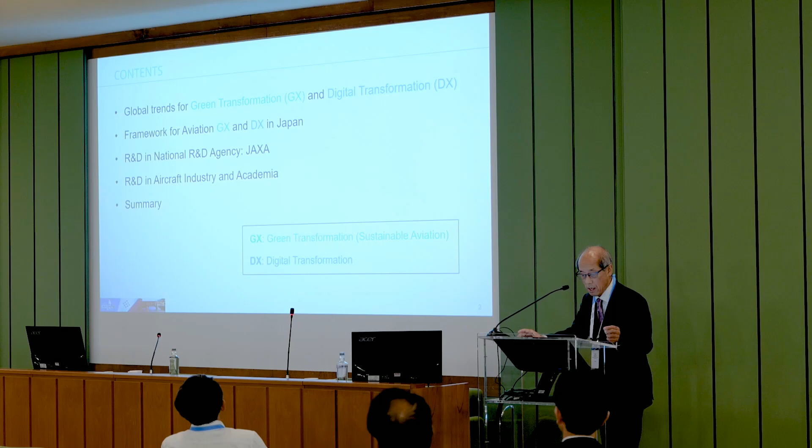In my presentation, firstly I'd like to talk briefly about global trends for green transformation, GX, and digital transformation, DX. GX is recently well used in Japan, and its meaning is pretty similar to sustainable aviation, a very common term in the aviation world. DX, digital transformation, is a well-known term worldwide. Next, I'd like to introduce the framework of aviation GX and DX in Japan, then introduce some featured R&D activities in the national R&D agency, that is JAXA, aircraft industry, and academia.

First, I'd like to talk about global trends for GX and DX as background. Thinking about the circumstances of global aviation, the civil aviation market is expected to continue expanding after the severe shrink due to the COVID-19 pandemic. In this trend, the Asia-Pacific region is particularly a promising region that will drive global aircraft demand. In addition, the global aircraft industry is coping with new challenges such as decarbonization, that is GX, DX, and supply chain resilience.

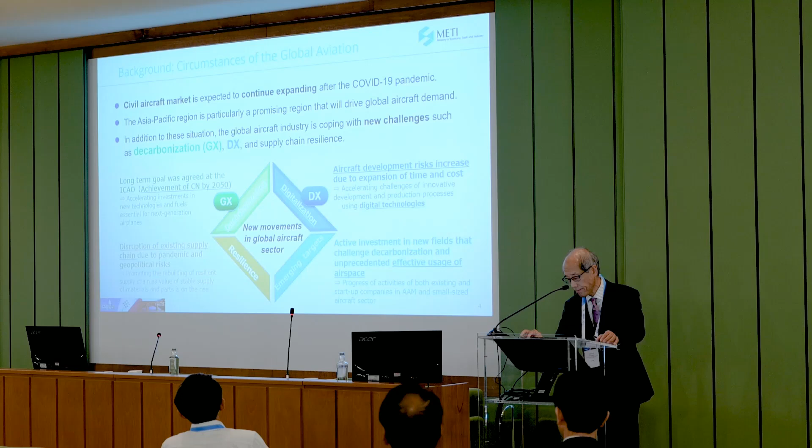Thinking about the background of GX, an important topic is the global target of net zero carbon emissions by 2050. The ICAO Assembly adopted this aspirational goal two years ago. Based on this situation, GX sustainable aviation has become a worldwide challenge in the aviation sector. Since only one solution is not enough to achieve this goal, various solutions such as SAF and new technologies like electrification and hydrogen, as well as successive improvement of conventional technologies, should be pursued to achieve this goal.

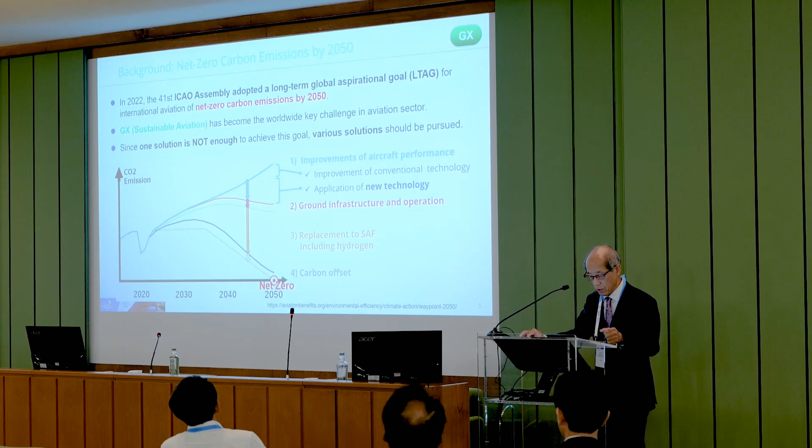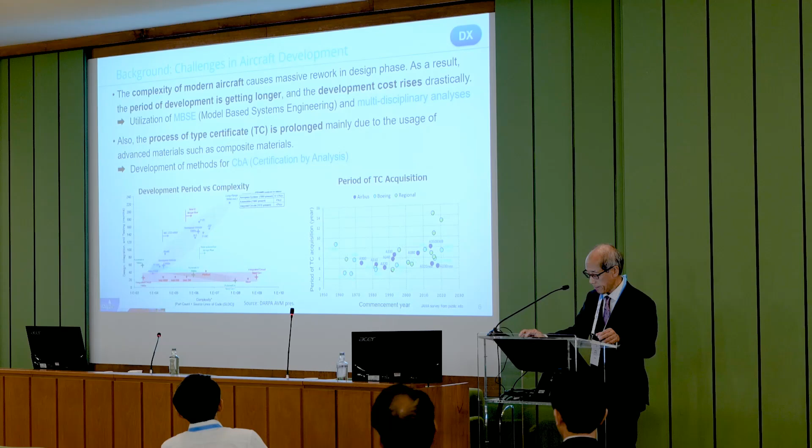Let me talk about the framework for aviation GX and DX in Japan, from three points of view: the overall framework, the framework for standardization, and the consortium as an ecosystem.

strengthen the collaboration of 4 ministries to facilitate the R&Ds in Japanese industry and other sectors. JAXA, Japan Aerospace Exploration Agency, is a unique R&D agency specialized for aerospace technology in Japan. It has a role as a hub to connect all partners in this framework - government, organizations, academia, and companies - and to facilitate collaboration among these partners.

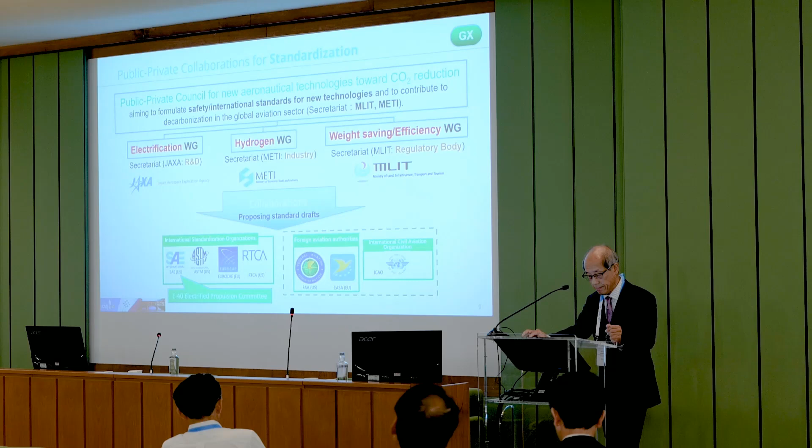The third framework is a consortium as an ecosystem for open innovation in aviation activities. The one in charge of GX is the Electrification Challenge for Aircraft Consortium, called ECLAIR. This consortium was established 6 years ago, led by JAXA.

Now it has 148 members from various sectors of expertise. At the beginning of this consortium, it created the future vision of electrification of aircraft, and then made and shared the technological roadmap towards this vision. Now, under this consortium, many partners are doing many kinds of collaborations along the technology roadmap.

The second consortium, in terms of DX, is CHAIN-X, which was established 2 years ago, led by JAXA, with support from METI, JADC, JAI, and so forth. Now it has almost 50 members. The objective of this CHAIN-X consortium is to expand the scale of Japanese aviation industry and strengthen international competitiveness through DX. The mission of this consortium is to create innovation in development, production, and services in the aviation industry by promoting DX throughout the aircraft life cycle.

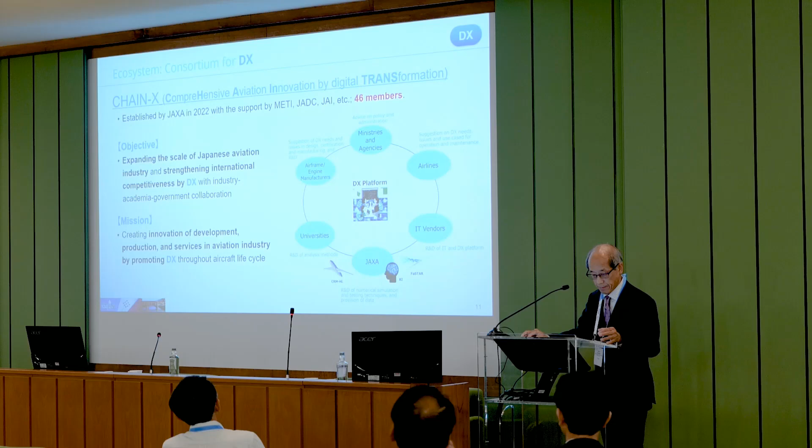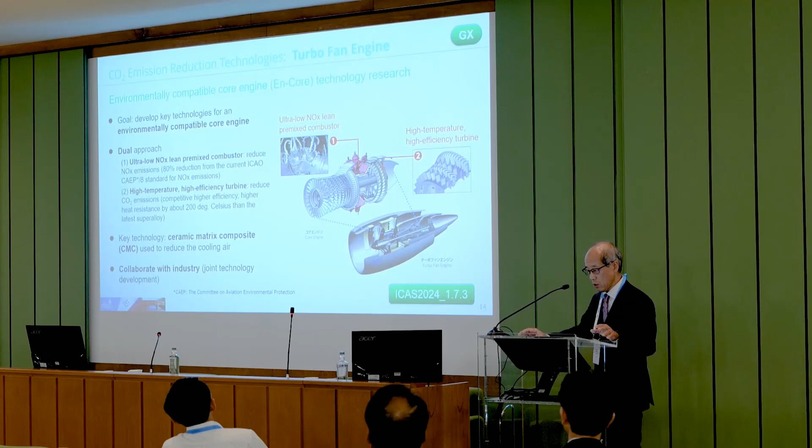Next, I'd like to introduce two large projects in terms of GX in JAXA. The first is the ongoing project on environmentally compatible core engine technology research to reduce CO2 emissions of conventional turbofan engines. The detail of this project was already presented this morning at this Congress. The goal of this project is to develop key technologies for an environmentally compatible core engine. Japanese aero engine industries have not had a big share of the high temperature and high pressure components in international aero engine developments, so we aim to have a higher share based on new technologies acquired in this project.

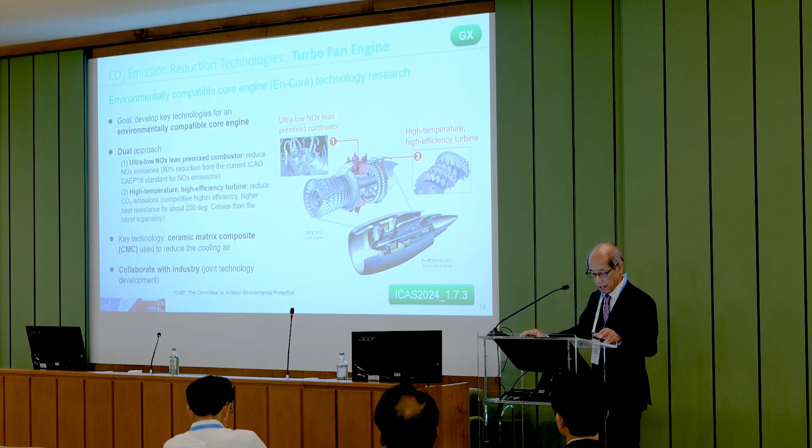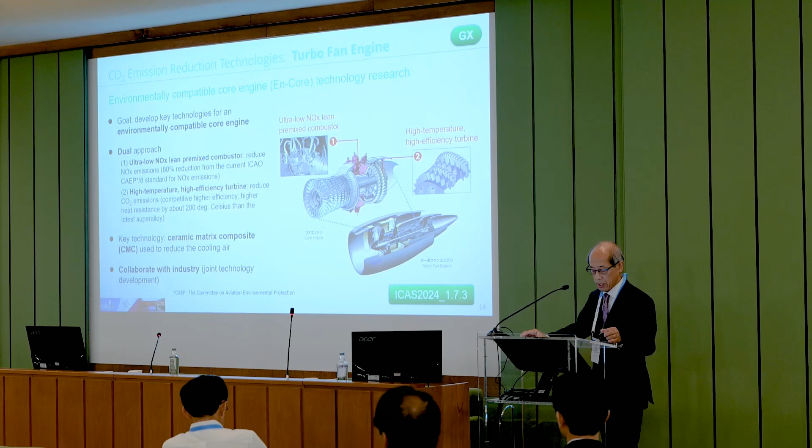We are conducting dual developments in ultra-low NOx lean premixed combustor and high temperature, high efficiency turbine. We are conducting this project in close collaboration with industry, such as Kawasaki Heavy Industry, KHI, and IHI.

The second R&D topic in terms of GX in JAXA is on hybrid electric engine to reduce CO2 emissions for future aircraft. The goal of this project is to develop technology for electric aircraft and contribute to expansion of the Japanese aviation industry. We are developing and demonstrating the feasibility of JAXA's original concept for hybrid electric engine, shown in the right-hand side figure. This concept, called WAT, Wake Adaptive Thruster, is a kind of BLI - boundary layer ingestion - concept, with twin electric fans mounted on the rear body in a configured shape rear body as shown in this figure.

So electric generator is installed. The electric generator installed in the electric turbofan engine on the low pressure axis then generates electricity for electric motors to propel electric fans.

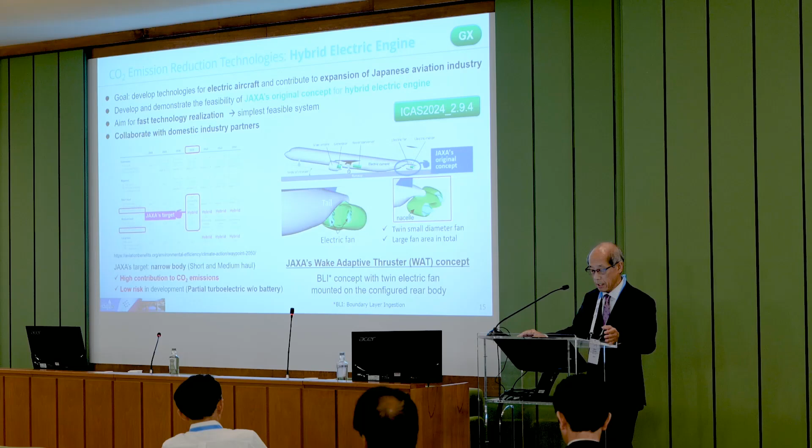So the main topic in terms of DX is on aircraft design, certification, production, and process integration. This project was strongly supported by METI through NEDO, New Energy and Industrial Technology Development Organization.

The goal of this project is to develop and demonstrate the aircraft design, production, certification processes by utilizing digital technologies. This project was conducted in collaboration with the aviation industry, as shown here. This project covers design DX, certification DX, and production DX, as shown in these figures. The key technologies for each area are MBSE, model-based systems engineering, certification by analysis (CBA), and digital thread, respectively.

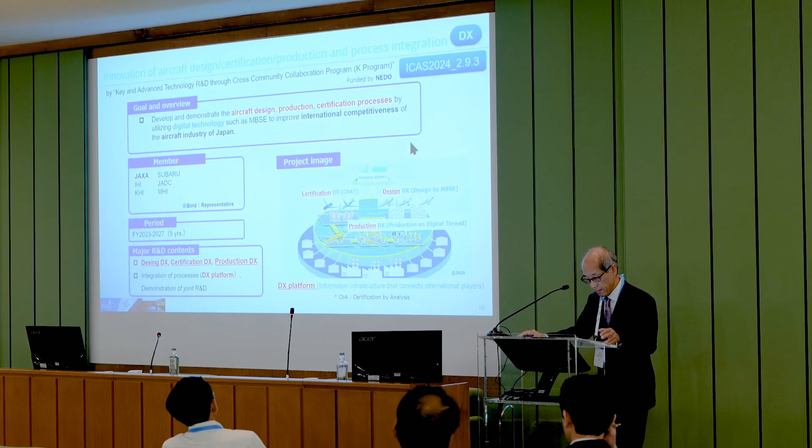Next, I'd like to talk about two featured R&D topics in aircraft industry and academia. The first topic, being done by aviation industry, is hydrogen aircraft core technologies.

KHI is undergoing this project with support by NEDO from 2021. The key technology covers hydrogen combustor, hydrogen supply system, and liquefied hydrogen tank, as well as conceptual design of the overall vehicle. JAXA is supporting with cryogenic pump technology and liquid hydrogen test facilities. Details of this activity will be presented by KHI in this session.

The second topic by aviation industry in terms of GX is hydrogen fuel cell electric propulsion system technology development. IHI Aerospace started this project this year and will continue it for 6 years. As shown in this diagram of the system configuration designed for a 40 passenger aircraft, it consists of a liquid hydrogen tank, heat exchanger, hydrogen fuel cell, battery, electric motor, as well as power electronics like inverters, as shown here.

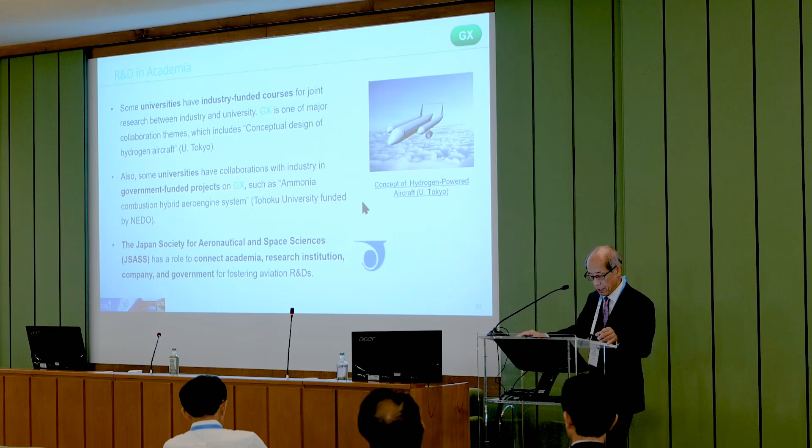Summarizing my presentation, I overviewed Japan's aviation R&D activities for the purpose of GX and DX. In the aviation sector of Japan, both GX and DX are being highly focused in accordance with Japanese government policies, such as carbon neutrality by 2050. We are utilizing ecosystems for GX and DX in an open innovation manner, including international partners, for effective R&D with high impact outcomes. Thank you very much for your kind attention.

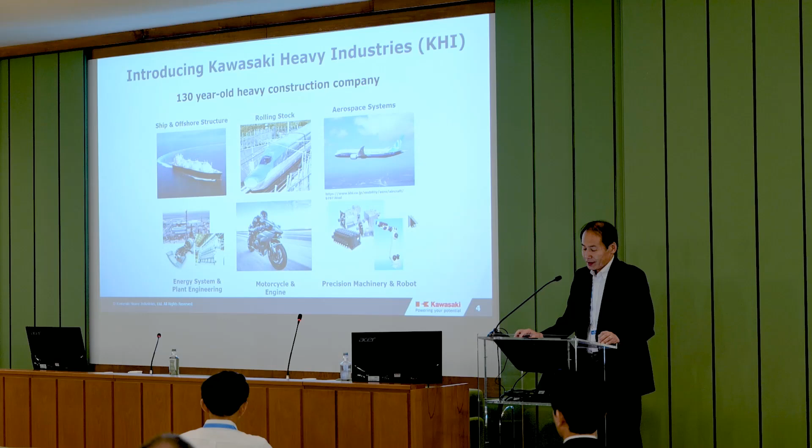Next, I would like to introduce our vision for a CO2-free hydrogen supply chain at KHI. Hydrogen can be produced in many ways, for example with abundant renewable energy like solar power or wind power generating electricity to produce hydrogen, which is then liquefied for efficient transport. Liquefied hydrogen is loaded into an LH2 carrier ship and transported to usage countries, where it can be used in many various ways.

For example, process use in industry, fuel cell vehicles, and power generation fuel. KHI now concentrates on developing many kinds of hydrogen-related technology.

Next slide, I would like to introduce some of the hydrogen-related technology development. This slide shows the world's first liquefied hydrogen carrier ship, Suiso Frontier. Suiso means hydrogen in Japanese. This ship has one LH2 tank, which uses a double shell vacuum insulation system allowing insulation without external energy, like a thermos.

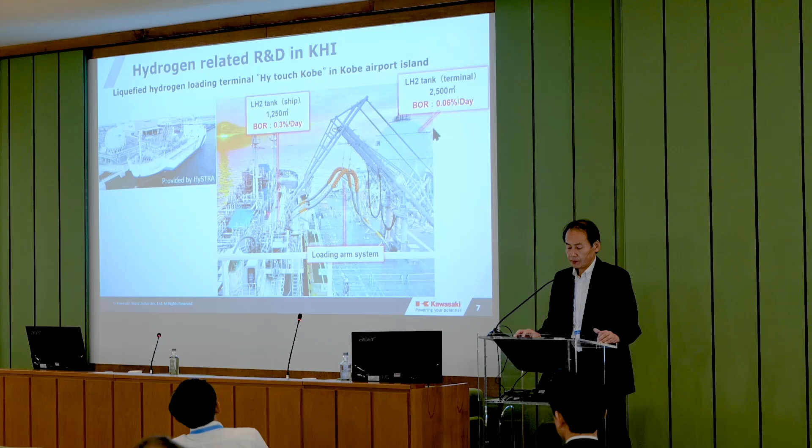As I mentioned the hydrogen-related products, we will continue further development of hydrogen-related products and business. And hydrogen aircraft core technology development has also started.

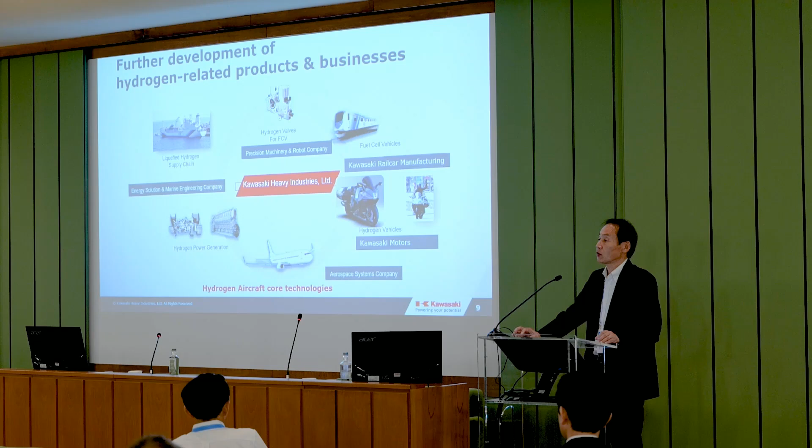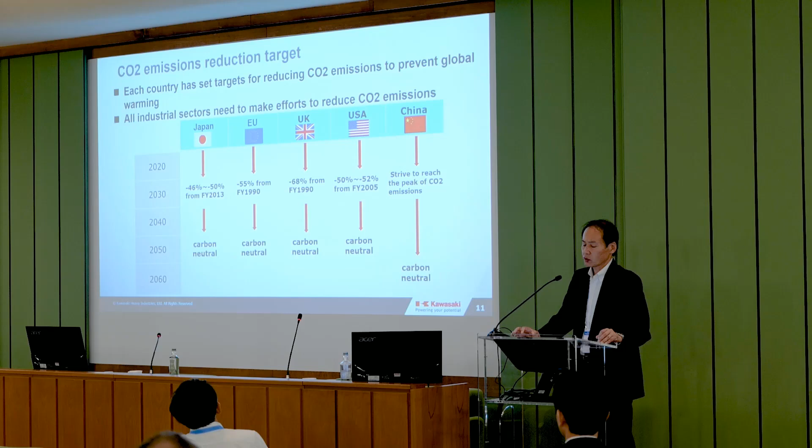Next, I would like to introduce the decarbonization of civil aviation. I think you all know very well that each country has set a target for reducing CO2 emissions to prevent global warming. All industry sectors need to make efforts to reduce CO2 emissions. In the civil aviation industry, ICAO adopted a collective long-term global aspirational goal of net zero carbon emissions from aviation by 2050. Expectations are rising for new technology such as SAF, hydrogen, and electric propulsion that will reduce CO2 emissions.

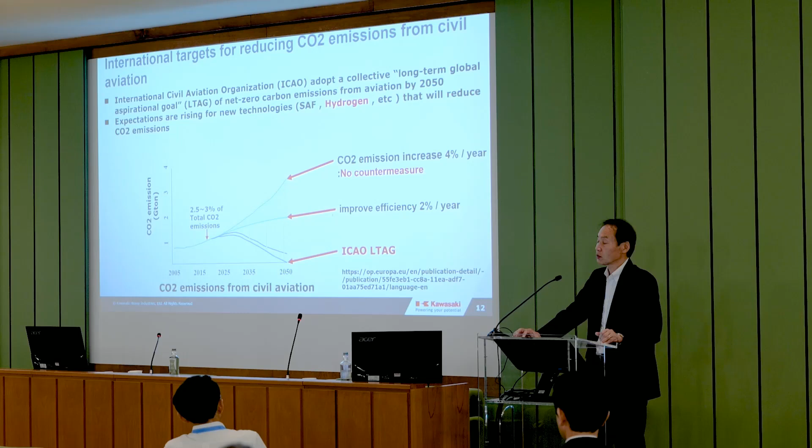Next, I would like to introduce development of core technology for hydrogen aircraft. This slide shows CO2 emission by aircraft size. The horizontal axis indicates the range of aircraft, and the vertical axis indicates the number of seats, or aircraft size. The dark blue area indicates high CO2 emission rate, while the light blue area indicates low CO2 emission. You can see medium-sized aircraft emit 67% of the CO2.

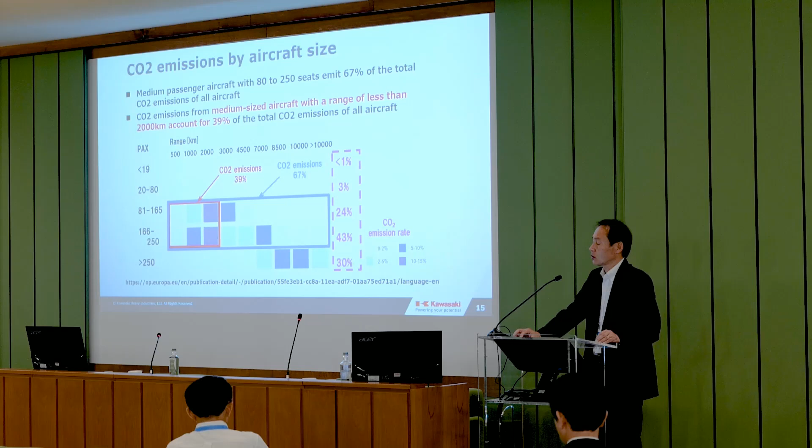Several hydrogen aircraft configurations are under consideration around the world. KHI selected this type of hydrogen aircraft as a target for technology development because it is a simple, lightweight system, and the reliability of existing aircraft can be inherited.

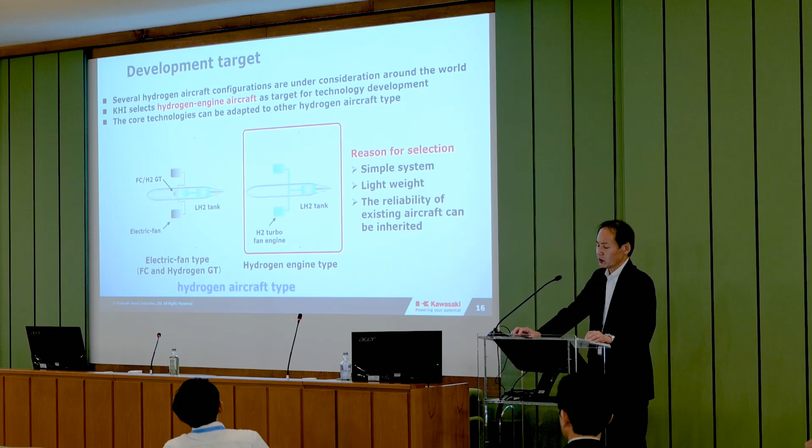This slide shows hydrogen properties versus jet fuel. In terms of energy per unit volume, liquefied hydrogen is 1/4 that of jet fuel, and gaseous hydrogen is 1/8 that of jet fuel. In terms of adiabatic flame temperature, hydrogen's flame temperature is 160 Kelvin higher than jet fuel's. So, according to these properties, using hydrogen as aviation fuel requires LH2 for volumetric efficiency, and the LH2 tank requires high-performance thermal insulation, while NOx formation from the high-temperature flame must be suppressed.

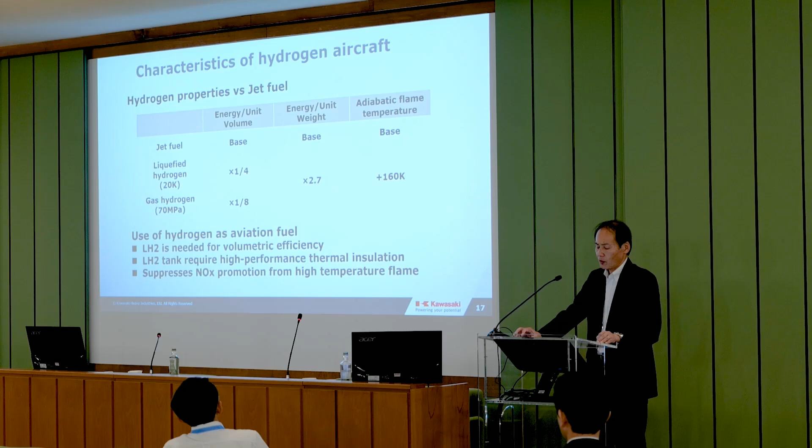So KHI is now undergoing R&D on core technologies for hydrogen aircraft, such as the combustor, supply system, and liquefied hydrogen tank, along with aircraft conceptual design supported by NEDO.

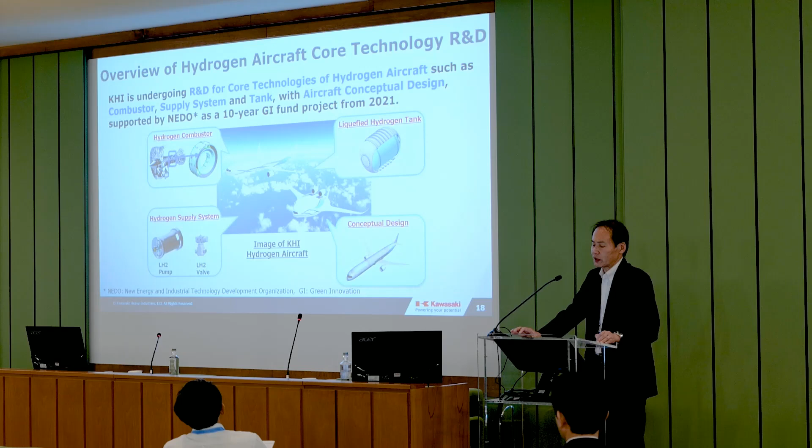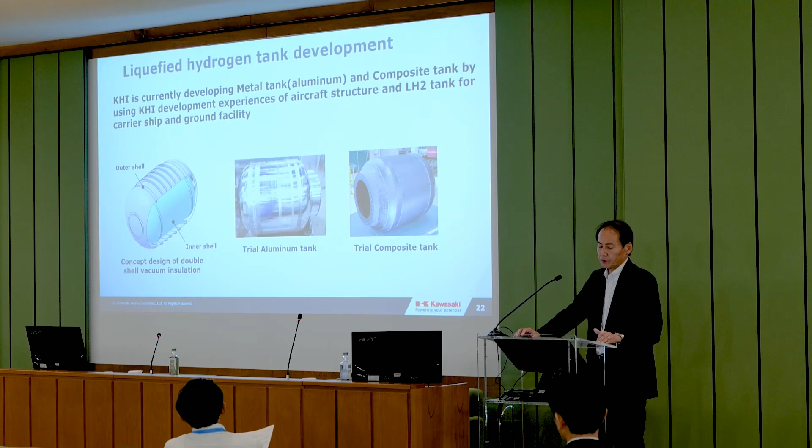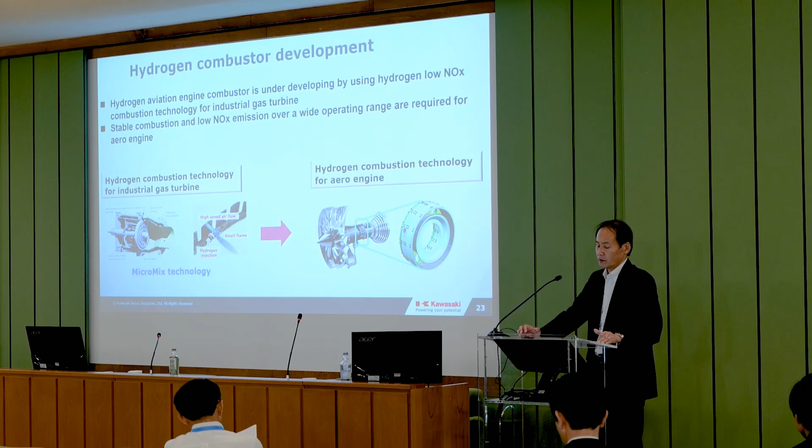Micromix technology uses many small flames to prevent the following causes of NOx emission: first is a hot spot in the flame, and second is long residence time in high temperature gas. Micromix technology uses high speed airflow and hydrogen injection.

It can immediately mix and make the small flame. This technology was basically developed at FH Aachen University in Germany. We collaborate with FH Aachen University to improve this micromix technology.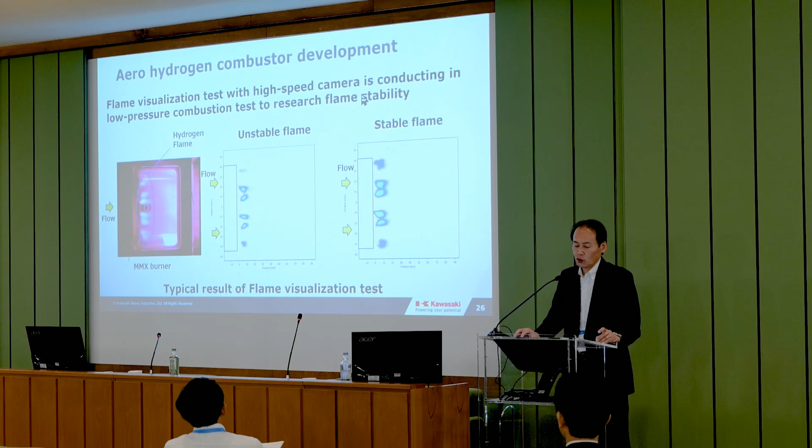This page shows liquefied hydrogen pump development. This illustration shows a booster pump developed by NIKKISO company.

This hydrogen supply system uses two kinds of pump: one is a booster pump, and another is the engine pump. The booster pump is set between the hydrogen tank and the engine pump.

This shows the LH2 pump test facility in JAXA, and now we have conducted performance tests with LN2, and LH2 tests are currently being conducted.

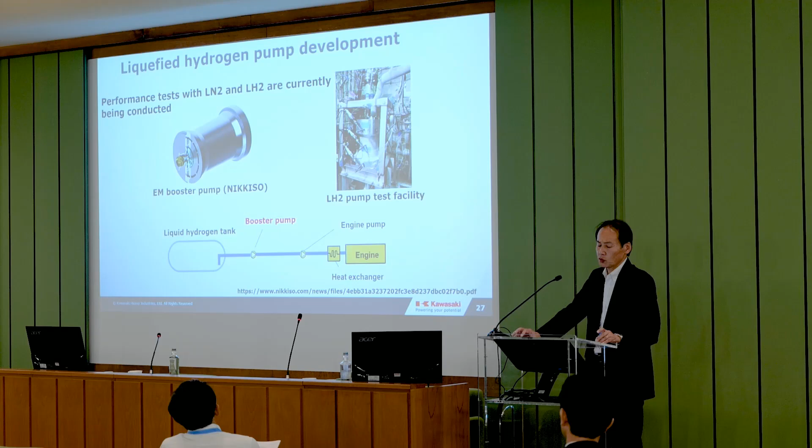This page shows the integrated ground test plan. We plan to conduct an integrated demonstration ground test of the complete hydrogen system from liquefied hydrogen tank to hydrogen engine in 2029 to 2030.

We will use an aero hydrogen engine developed in Kawasaki. The first test operation of this engine with hydrogen fuel will be conducted this year at JAXA's Noshiro test facility.

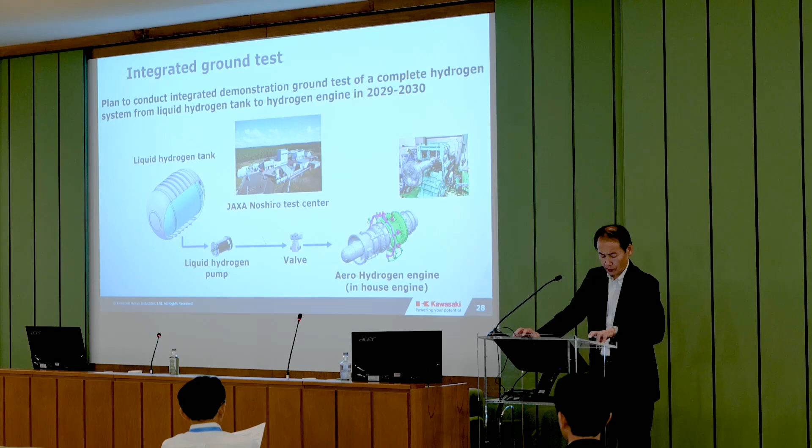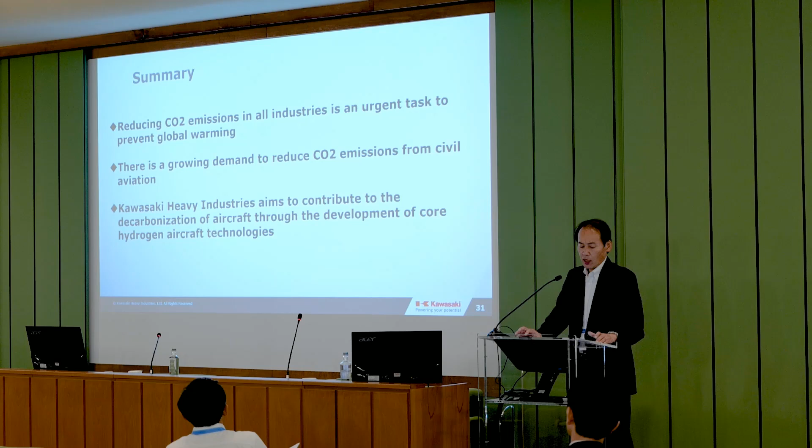So this is a summary of this presentation. Reduction of CO2 emission in all industry is an urgent task to prevent global warming. There is a growing demand to reduce CO2 emission from civil aviation, and Kawasaki Heavy Industry aims to contribute to the decarbonization of aircraft through the development of core hydrogen aircraft technology.

This work is supported by the New Energy and Industrial Technology Development Organization. Thank you so much for your attention.

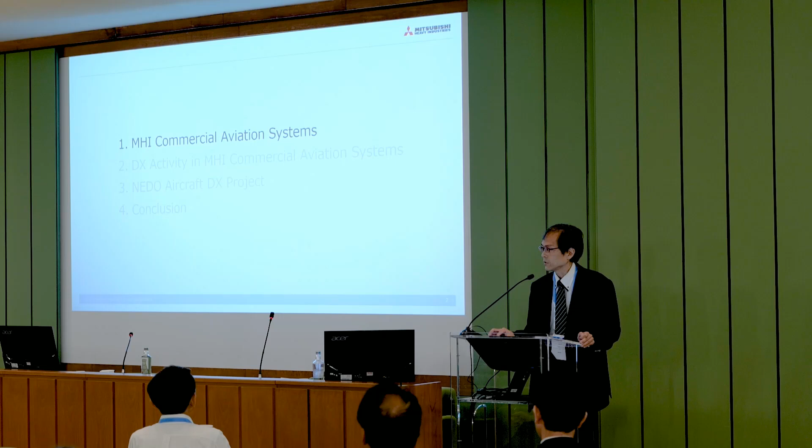Thank you for giving me the opportunity to conduct this presentation. Today I will explain my company's, Mitsubishi Heavy Industries', digital transformation in commercial aircraft, especially in the development and manufacturing phases. This page shows the contents of my presentation, starting with an overview of my company MHI Commercial Aviation Systems, then I will touch on the topic of my company's DX, digital transformation activities. I will also explain the NEDO aircraft DX project, which was slightly explained by Watanabe-san—it's a national funded DX activity. And I will finish with my conclusions.

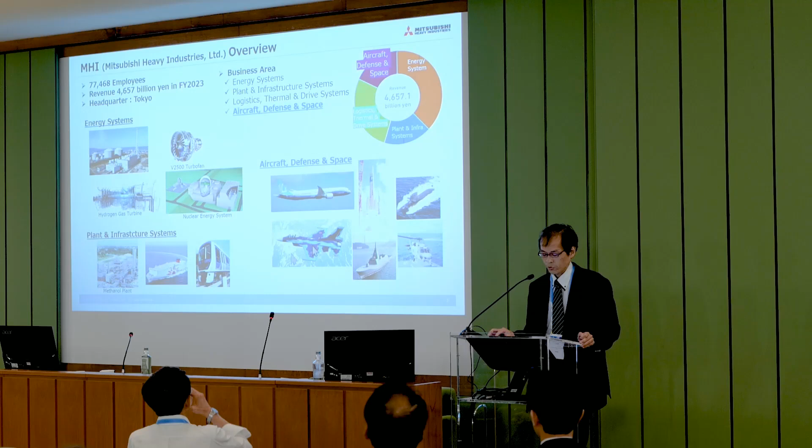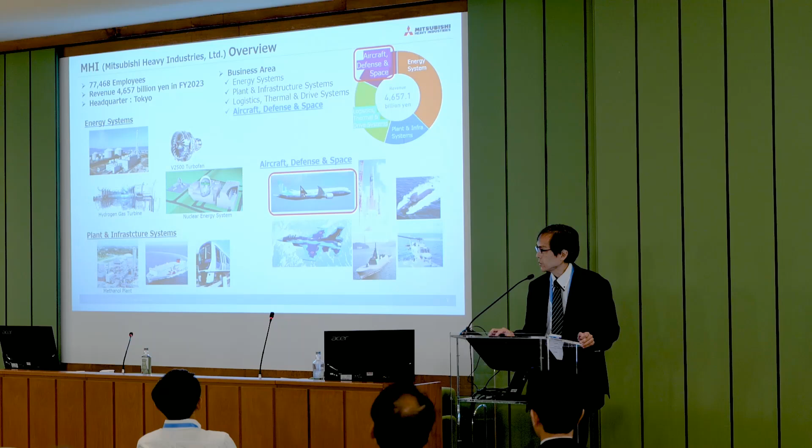Okay, this page shows an overview of MHI. We have a variety of products, as you can see. Our headquarters is located in Tokyo, Japan. Today I will focus on the DX activity in the commercial aircraft area.

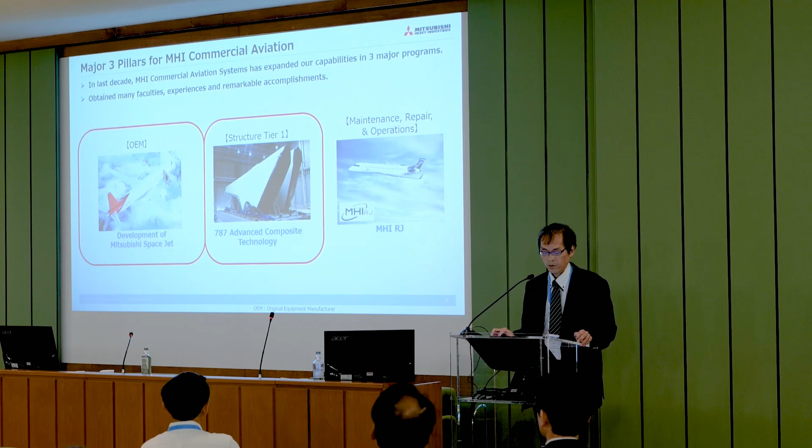This page shows our OEM capability. In the SpaceJet program, we gained the capability for whole aircraft development against the latest certification requirements. Along this V development process, on the left side we started aircraft level design and went down to implementation, including requirement validation according to the ARP 4754 process. On the right side is the verification area, where we conducted integration and verification to the top level aircraft with integrated test facilities and flight test vehicles, together with global suppliers.

But in this integration activity, we had a lot of trouble mainly in the integration process. One of the most important lessons learned in this project is that we had to establish a mature and practical process before starting the project. We also need to consider interoperability with global suppliers to share technical information, especially in the integration process. This lesson learned is the key driver to start the DX activity in the NEDO project.

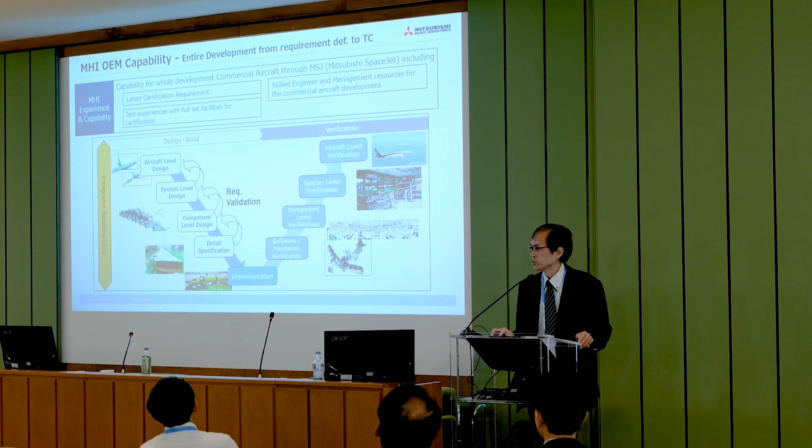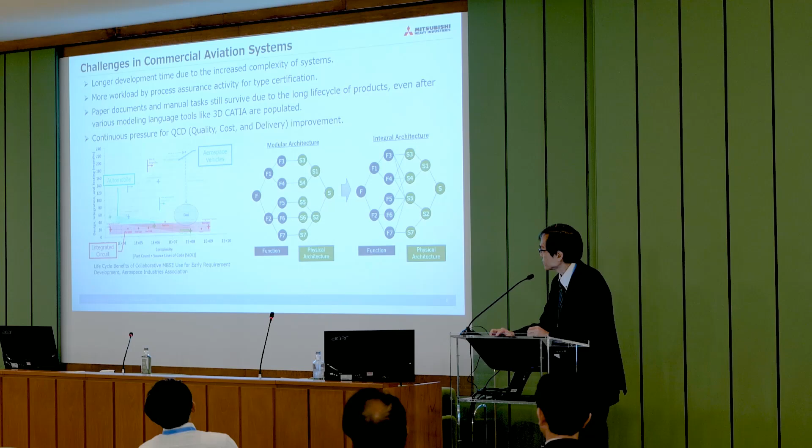Okay, next I will introduce the DX activity in my company. This page shows current issues in commercial aircraft.

This figure in the bottom left is my favorite one. It shows that only aerospace vehicles need a longer development time due to increased size and complexity of systems. One reason, I believe, is that aircraft has an integral architecture, meaning there is a close relationship between function and physical architecture. This kind of architecture always needs more negotiation or integrated analysis in the design process, and as a result, in most cases we need to conduct design changes in the later integration phase of development. That is one of the main reasons for this issue, I think.

Another aspect is the increased workload from process assurance against type certification, as I mentioned with the ARP 4754 process. Also, paper document manual tasks still survive due to the long life cycle of products. For example, this Boeing product's development started in 1980 or so. In this project we still have a lot of paperwork processes due to its long life cycle. Of course, as already mentioned, we need to continue improvement for QCD - quality, cost, and delivery - in each project.

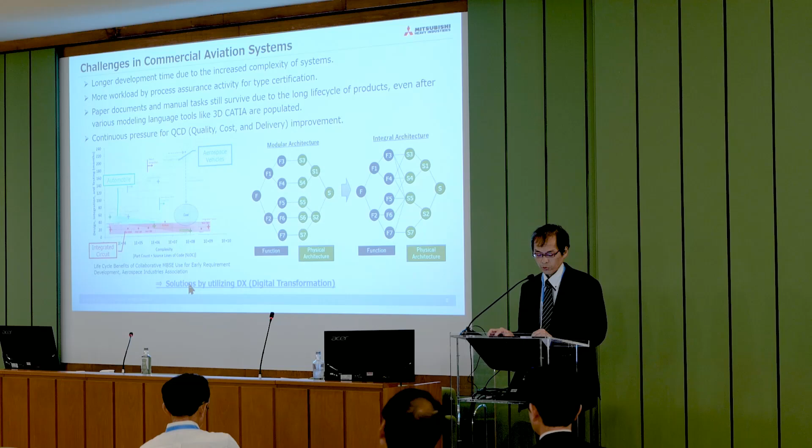So to resolve this situation, we need a solution by utilizing digital transformation.

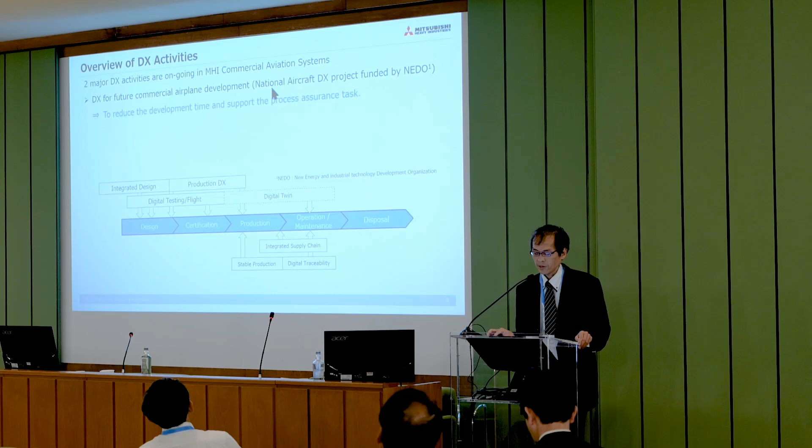This page explains the two major DX activities ongoing in my company. One is DX for future commercial airplane development - a national aircraft DX project funded by NEDO to prepare for the next aircraft development. It covers design, certification, and the beginning of the production phase. The other is Tier 1 DX, a company internal activity covering production and later stages. In the following pages, I will explain the Tier 1 production DX activity first, and after that I will explain more about the future DX activities.

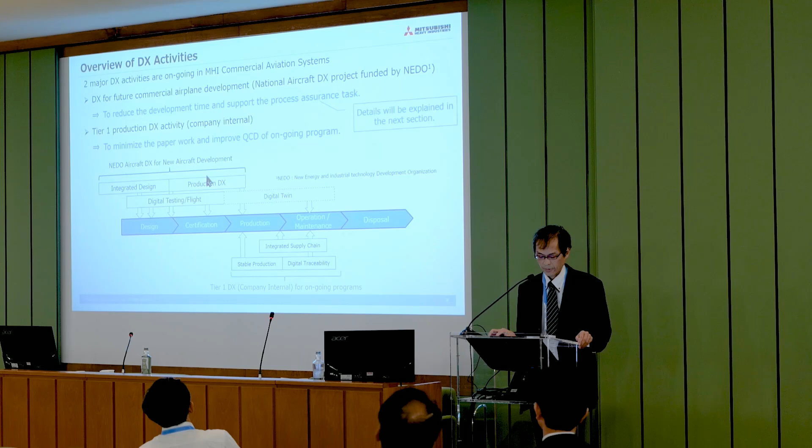As I mentioned, this is a bottom-up approach for customer satisfaction in ongoing programs like the Boeing 777. We need to conduct this DX activity while keeping stable production - we cannot stop this kind of manufacturing. I will pick up three typical examples in this activity.

Case 1 is DX in integrated supply chain. Data from all global suppliers are collected, and we established a communication tool to store that information and share it with the OEM, meaning for example Boeing. This collected data is analyzed and visualized as integrated supply chain data with Boeing, for example, supporting total stable production and allowing us to check any issues as quickly as possible.

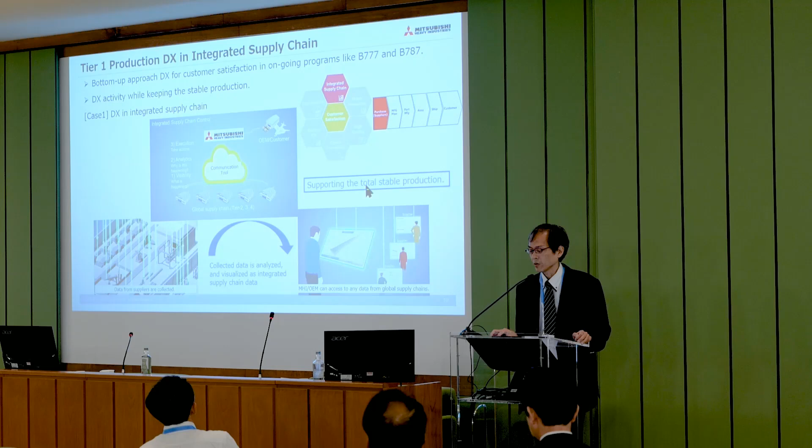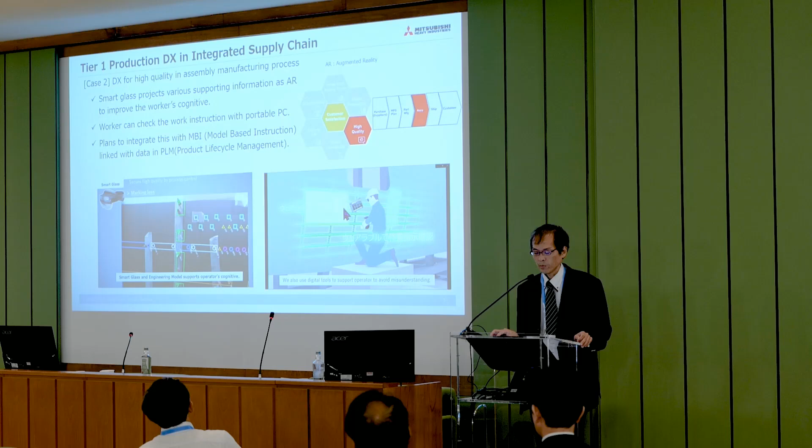Second example is high quality. We use the smart glass to project various supporting information as augmented reality to improve workers' cognitive awareness. This figure shows the image through the smart glass. These colored circles, triangles, and rectangles indicate where the part should be installed. Workers can also check work instructions with a portable PC. This kind of DX will reduce human error and lead to higher quality production.

I picked up 3 examples of DX activities, but as I mentioned, this is a continuous improvement process, and we are doing a lot of other activities. We will continue that kind of activity through the next aircraft development.

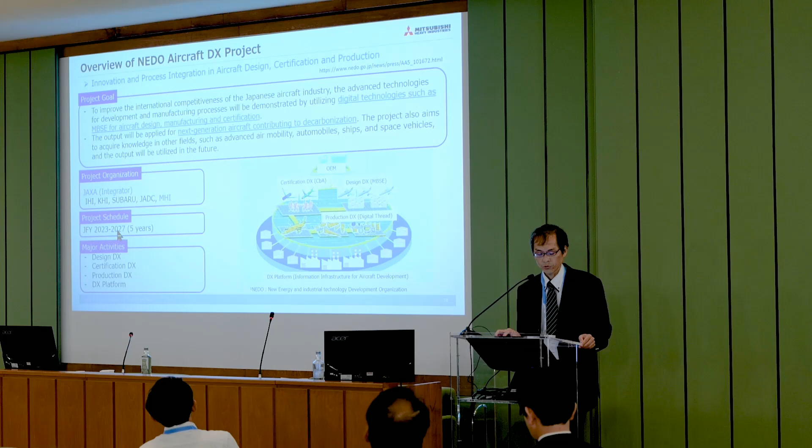This page shows the overview of our company's DX activity in the project. We are participating in design DX, production DX, and certification DX activity. In design DX, starting from the top stakeholder requirement, going down to the subsystem requirement, we prepare a system model described by the system modeling language.

The data is linked to each other, and we will also make a linkage with analysis tools to realize a more automated design process. The bottom of the design DX is the interface with production DX.

From a manufacturing point of view, this 3D CATIA model is the most important information. We plan to make a linkage between this CATIA model and the system model, realizing total data linkage from design to production. We believe this kind of data linkage will minimize the negative impact on the production line in case of top-level requirement changes in the project, because we can easily assess the impact on production.

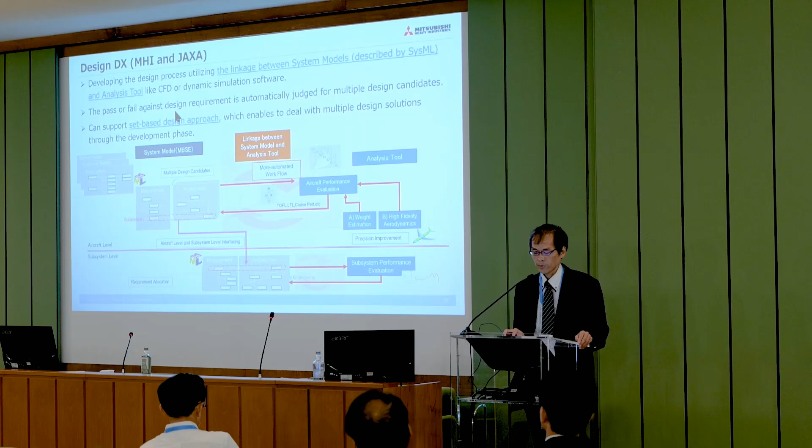In design DX, we are developing the design process utilizing the linkage between the system model and analysis tools like CFD, realizing a more automated workflow. Pass or fail against the design requirement is automatically judged for multiple design candidates. This tool can also support the set-based design approach, which enables us to deal with multiple design candidates through the development phase.

Our Mitsubishi SpaceJet test data is used for the verification and validation of the analysis tool, also covering uncertainty quantification. This is one of the key processes for CBA activity.

Another feature is that we plan to conduct a trial audit with Japanese authorities using the system model compliance metrics. At the end of the project, we will publish the CBA guideline covering the process and the lessons learned.

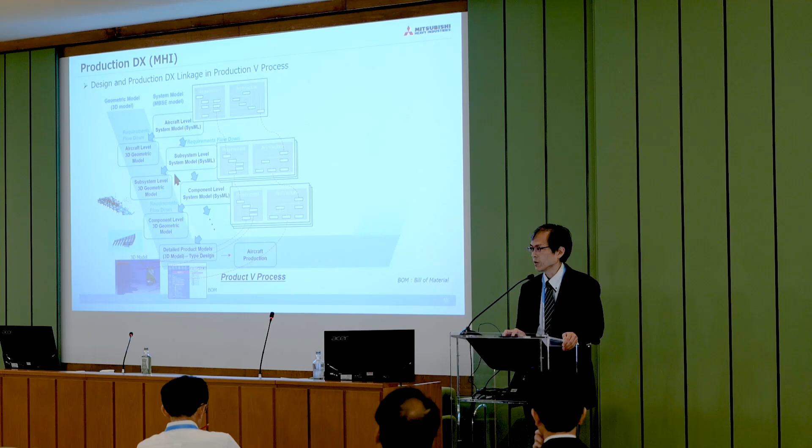Okay, I will explain the production DX. As I mentioned, from the manufacturing point of view, 3D CATIA data is the most important. So we believe that in the V process, we need to conduct a parallel activity: one for the system model, MBSE, and the other for the geometric model, the 3D model. I think these two activities should be synchronized in the design process, the development process.

Another thing I want to mention is that this is a product aircraft V process. We need to consider the production system V process, also covering the system model and the 3D model for the production system, and make a data linkage between these two V's. This will enable us to start the production system design at an early stage of development by using the information from the system model. We may also be able to change the aircraft design by considering the limitations of the production system or some requirement for production. This kind of linkage will also reduce the risk of design changes in the later phase of the program.

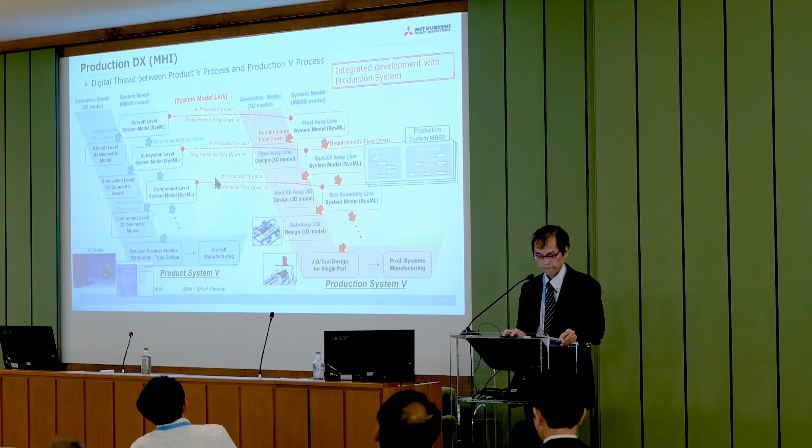From these two V process information streams, we also plan to prepare the data required for manufacturing preparation. From these two processes, we will prepare, for example, the E-BOM, the bill of material, and also the BOP, the bill of process. It's a kind of manufacturing process development, with work procedures and instructions using augmented reality. This kind of information can be prepared based on the V process information, also linked to each other in one PLM, the Product Lifecycle Management Platform.

As a result, for example, the worker can access the necessary information in a single source database. I think that in this kind of situation we can drastically reduce manual tasks in manufacturing preparation, and also reduce the risk of human error in this process. This figure is a kind of final image of the production DX activities.

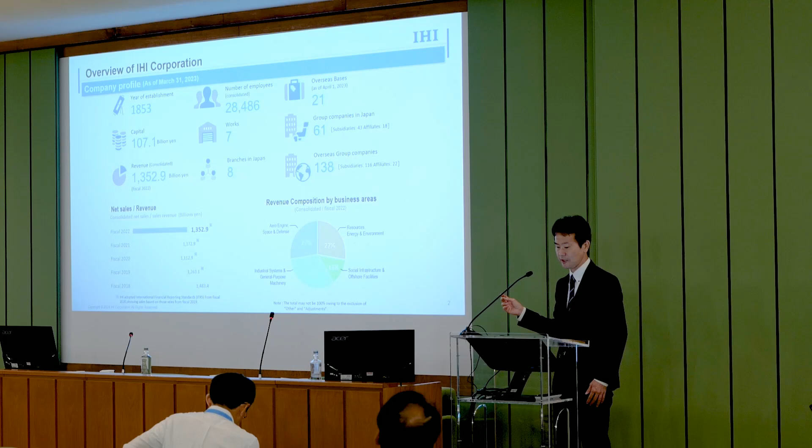Last year we celebrated 170 years. We started first in shipbuilding - the shipyard was our first job. Right now we have 4 business areas: one is aerospace, and the others are energy solutions, social infrastructure, and general industrial systems.

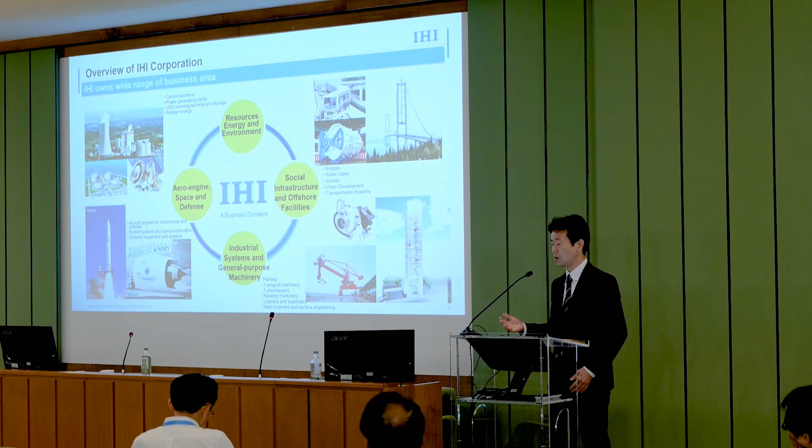When our company considers aircraft systems electrification, we are thinking about internal collaboration for new aircraft systems. IHI is one of the largest aircraft engine manufacturers in Japan, and we are considering moving towards a carbon neutral society, including aircraft electrification. We have also traditionally, over the past 20 to 30 years, been implementing composite materials for aircraft systems, and right now we are doing electrification systems development.

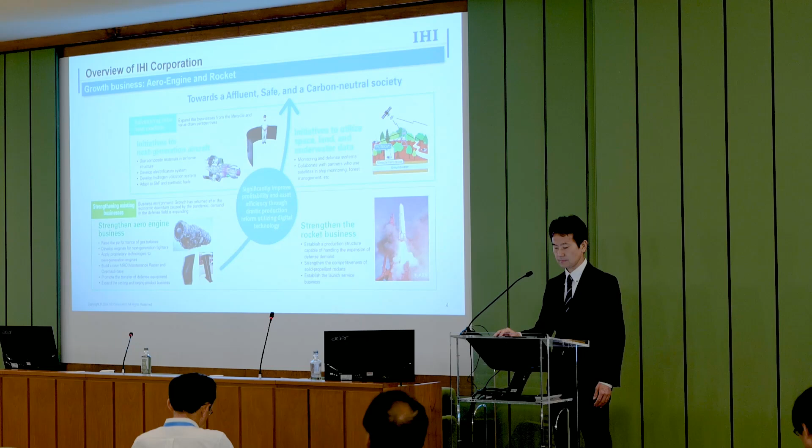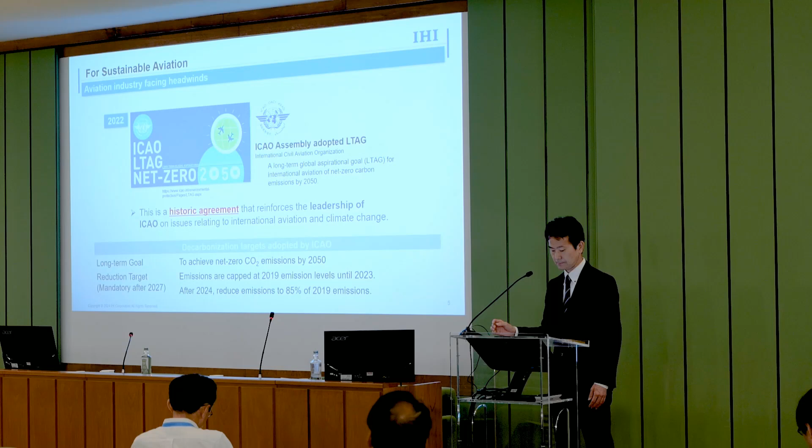From this chart you've already seen, right now we have committed to carbon net zero by 2050. As you know, not only technology but also alternative fuels and operational improvement are important. Among technology improvements, electrification is one of the pillars, but more efficient technologies, lightweight design, and aerodynamics improvement will also be required. My company is now tackling electrification as well as lightweight and more efficient technologies, implementing FRP composite material technology into aircraft engines and fuselages.

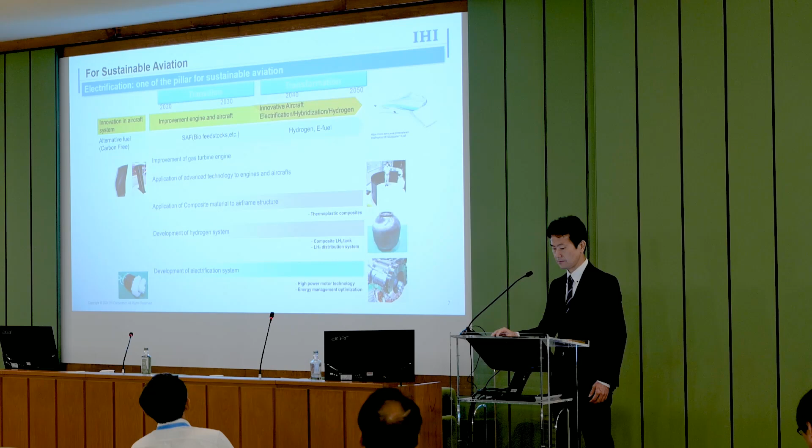So from this chart, I would like to introduce what IHI is now developing for aircraft system electrification. When we talk about aircraft system electrification, many people are talking about hybrid electric propulsion. That is very easy to understand, but we consider that aircraft systems electrification is not finished. It's ongoing, and this is a large part of the systems electrification.

We also consider the integration between the aircraft system and propulsion to be very important. If you only put the battery or a large generator into the propulsion systems, the weight penalty is so huge. So we need systems integration and optimization. Integration of the system is mandatory.

To achieve that, we are doing several key technology developments. We've started the more electric aircraft systems development first. One is ACS, a very high capable air cooling system for the power electronics - meaning the motor controller or converter, such kind of systems. Now we need liquid cooling systems, but we enlarge the capability of the air cooling system and integrate it into the air management system of the aircraft.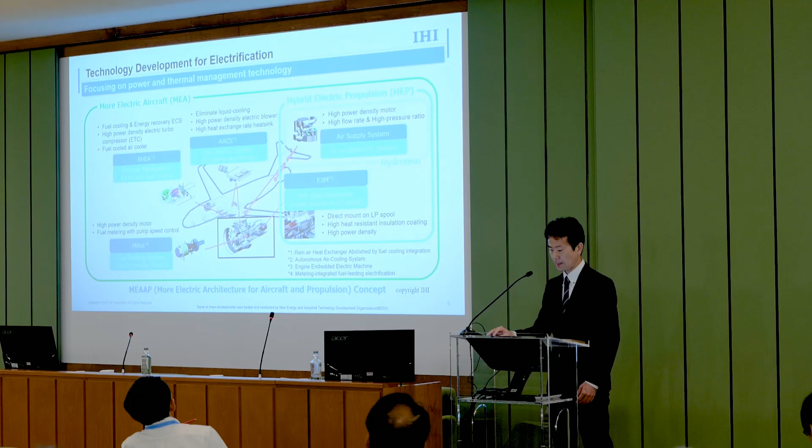I've introduced the key elements of the systems, but these common key technologies can be used for a wide range of applications. The key technology consists of two types: one is high heat resistant motors, including the E3M and MEFI; the other is a gas bearing ultra high speed motor that can be used for turbochargers. These two technologies can be used, for example, in regional class aircraft for FC propulsion with fuel cell systems - air supply units and also propulsion units.

For single-aisle or much larger class aircraft, these technologies can be used for hybrid electric propulsion systems. We are also considering using fuel cell systems for APUs, which can be used for all sizes of the aircraft.

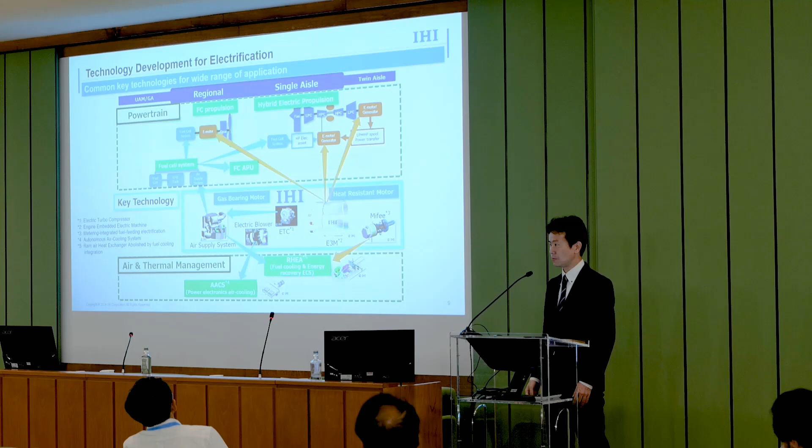Also, one of the important pillars is thermal management. If you want to use large amounts of electricity in the aircraft, that is a closed area, and it's very difficult to dissipate the heat. Megawatt class generators and motor controllers dissipate so much heat, but typically such heat coming from the fuselage is very difficult to dissipate. Our concept is to gather all of the wasted heat through fuel and combine it with the air and thermal management system, again combining aircraft thermal management and engine thermal management. This kind of integration work is what IHI is now trying to achieve.

So next chart. This is what we did in the past national project. We've already done 2 national projects, and we are now doing the third project.

The first project was done from 2016 to 2019. In that project, we did subscale demonstrations for the 250 kilowatt class, first generation E3M, engine embedded electric machine, and also the first generation of the electric blowers, ultra high speed blowers.

In this project, the 250 kilowatt class E3M with high power density and heat resistance was demonstrated, and air cooling system for the 100 kilowatt class power electronics was demonstrated. This project was funded through NEDO, New Energy and Industrial Technology Development Organization, a subsidiary of METI, Ministry of Economy, Trade and Industry.

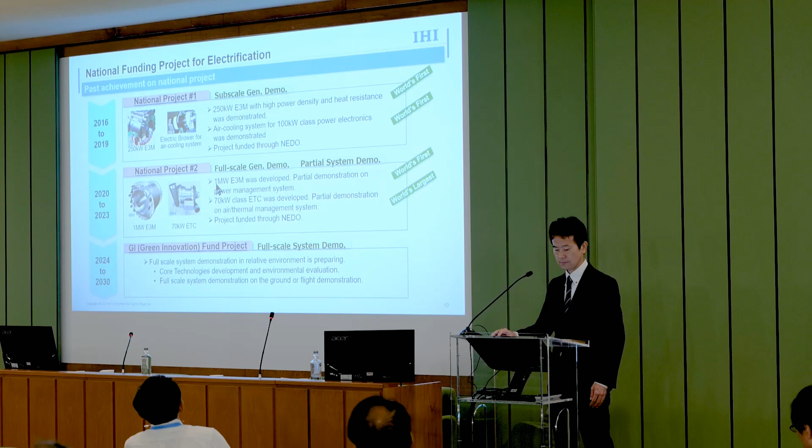This chart and the next chart show what we are planning in the GI funding project for aircraft electrification. The title of the project is the Electric Power and Thermal Air Management System and Equipment Electrification. This title shows that everything is electrified. That's what we're now trying to achieve.

The objective of this project is to achieve TRL6 for the core technologies in the electric power and thermal air management system by 2030. The target for fuel efficiency improvement is 5% or more compared to current single-aisle aircraft, and to demonstrate its feasibility under operation conditions.

In this project, 2 core technologies have already been mentioned: one is the 1 megawatt class generator with a power density more than twice that of conventional aircraft. The other is electric turbo compressors, turbochargers, with the world's largest output. Currently 55 kilowatt is the largest for aircraft use, and we aim for more.

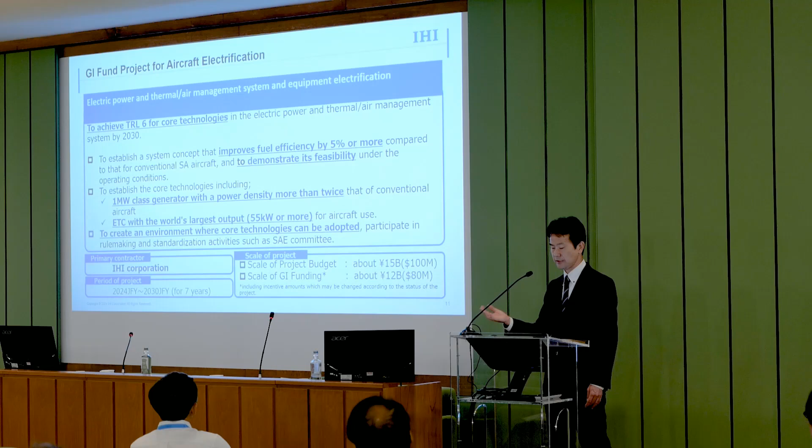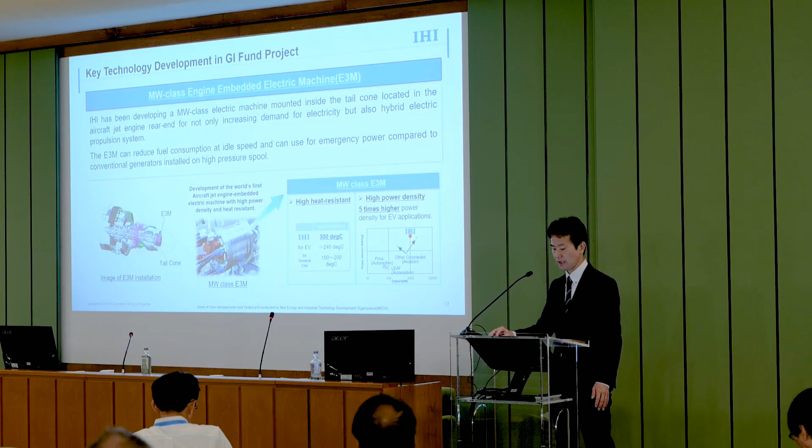One of the important things is the ground testing facility, which is one of the key points. For the preparation of the ground testing facilities, we are collaboratively working with Akita University. This is outside of the current need of the project, but using this kind of collaborative activity, we are preparing the actual megawatt class testing facility, and also the entire aircraft system level, air systems testing facility.

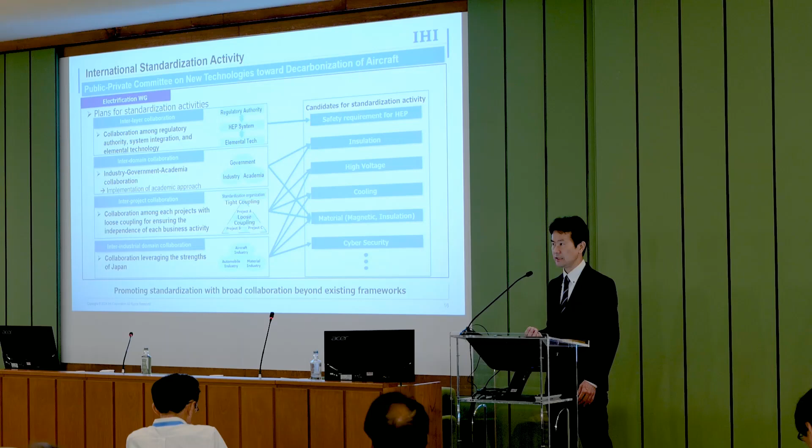This is the last chart, but we also do activities for standardization. Traditionally, Japanese companies have a very weak presence in these areas, so we are trying to make our presence much bigger in the international standardization activities.

So the conclusion: the aviation industry is committed to the aggressive goal of net zero 2050, and all technology options should be pursued to achieve it. IHI will contribute to net zero aviation through electrification technologies by bringing our wisdom together, not only from the aero engines business area, but also others in the IHI group. Our final goal is to provide a safe, comfortable, economical, and eco-friendly air transportation system.

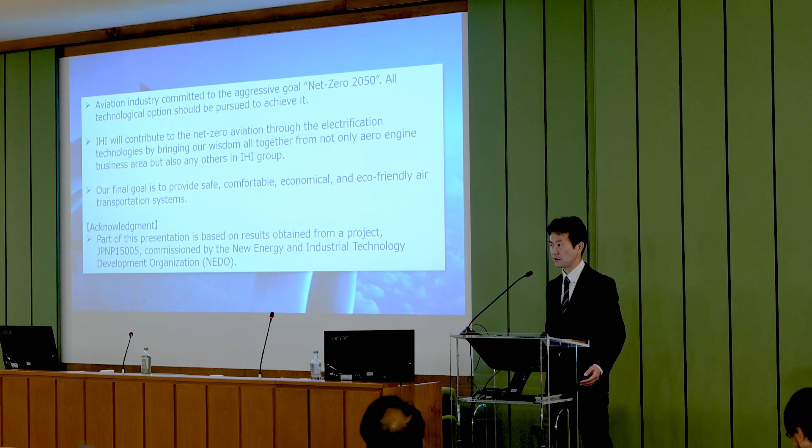And the acknowledgement: this presentation is based on the NEDO project result. Thank you for listening. Thank you very much.

So, any questions or comments from the audience?

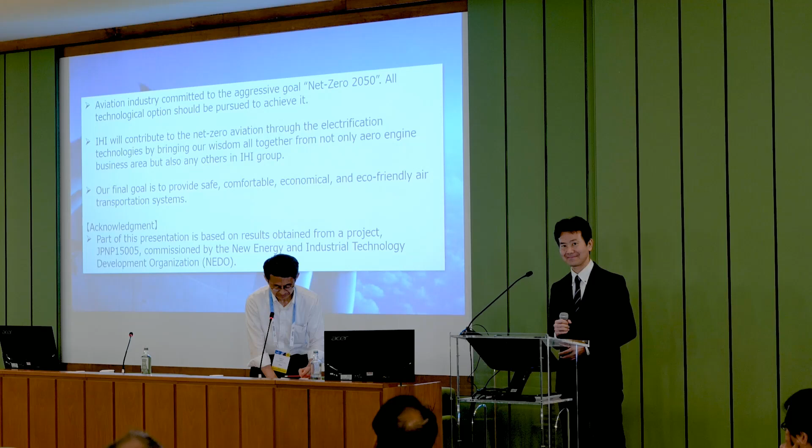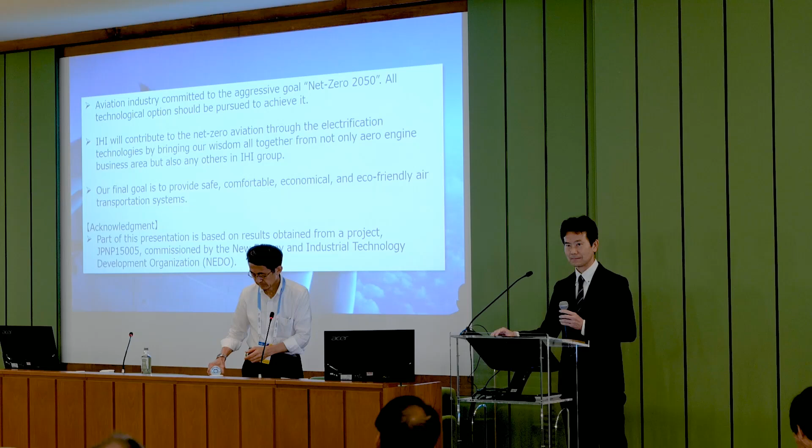Thank you for the interesting presentation. I've seen some components you develop which may suit as a replacement for existing components, but other components are more useful for embedding in a larger system. So I wonder what your plan is regarding cooperation and embedding the systems with OEMs, because I think it's not only for your own products, but maybe for other OEMs like Airbus, Boeing, or other aircraft companies. So when do they come in? This is basically the question: are they already involved, or do you develop these technologies and then, if mature, propose them to companies to be included in future products?

IHI started the electrification development around 2011, so 13 years ago. At the start point of that project, we had discussions with the OEMs. So this type of technology, the orientation of the technology development, is always aligned with the OEMs. That is the answer.

Thanks. Okay, so. Thank you for the presentation. I have a question. I'm very interested in your presentation about the electrical motor. Do you have any plan to finish your research and development and then apply it to the aircraft?

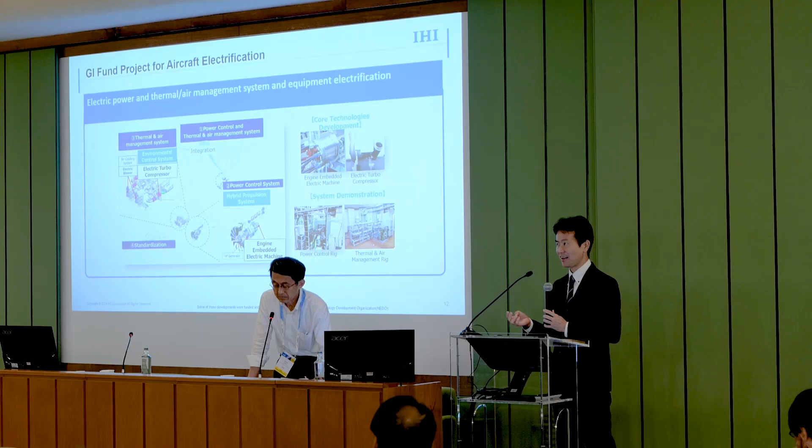Of course we are proposing to implement our motor for the actual aircraft. For example, the testing is already planned. We are planning with JAXA to implement this kind of motor in actual aircraft engines, but it's a kind of testing, and your question is about the actual implementation for the product.

Thank you. So I have another question. If the electrical motor is more than 1 megawatt, I think the thermal management is quite important. It's very complex. What method or what system will you use in your electrical motor?

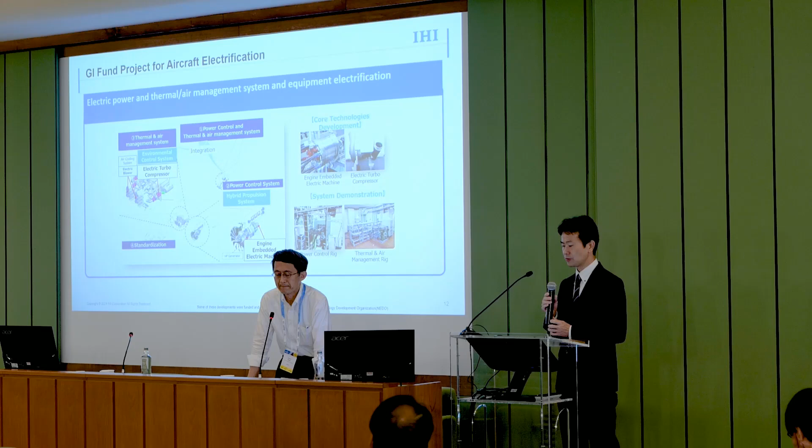For the electrical motors, we are considering one of the key points is high heat resistance. That has two meanings. One is that in aircraft systems, the voltage is typically very limited compared to ground-based systems, and the higher current will cause very high heat dissipation. That's one point. The other is that IHI is an engine manufacturer, and when we consider engine integration, the normal operation temperature is only around 200 degrees Celsius, meaning the oil can reach such temperatures. But in some cases, you should think about more harsh environments, for example cooling-less conditions, which we should withstand for some duration. Considering such conditions, we determined that high heat resistance is the most important key part if we integrate electric machines into the engine.

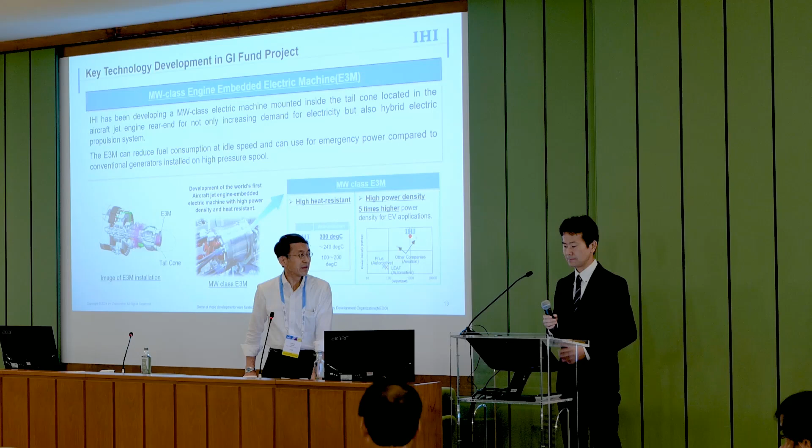Thank you. Okay, so if there is no more questions... no? Oh, all right, okay. Thank you very much for your presentation. Thank you.